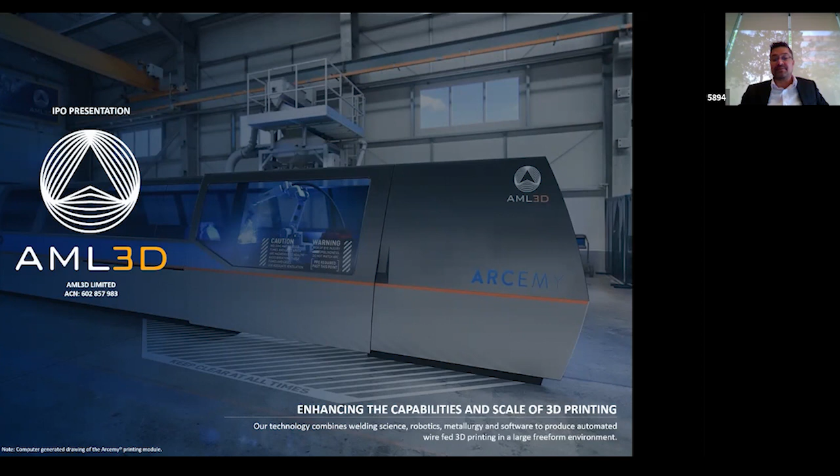AML3D specialises in large-scale 3D metal printing of commercial parts using proven wire arc additive manufacturing technology. We hold all major certifications and we're the only globally certified wire arc additive manufacturer on Lloyd's Register. So what this means is our clients can put our parts into commercial operating use.

WAMSOFT is our proprietary intellectual property which combines metallurgical science, software and robotic technology to produce large-scale, free-form 3D metal printed commercial parts. Our main manufacturing facility is located in Adelaide, Australia, and is currently being relocated to a larger premises to support our growth.

With the use of funds, we will be establishing a presence in Singapore, mainly to be closer to our clients there. Our technology is disruptive to traditional manufacturing processes such as subtractive, casting and forging methods. In particular, we deliver less waste, faster production at a more cost-effective price compared to traditional methods.

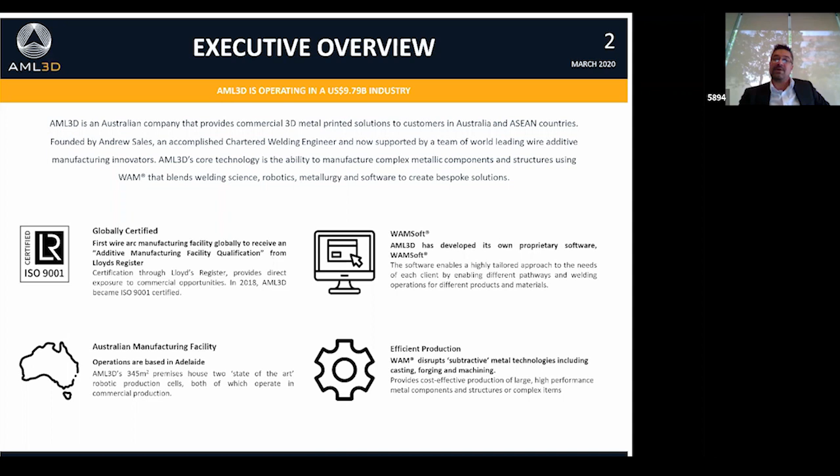A good example is one of our clients who currently buys a 1-ton aluminium billet and machines that down to 300 kilos for his finished part. We can 3D print that and deliver it to them, utilising 100% of the wire feedstock with zero waste.

In relation to the board, we have a very strong and balanced board with extensive industry experience across all the main markets that we operate in. Firstly, Stephen Gerlach, former chairman of Santos, Elders and Equatorial Mining, who brings corporate governance, listed company experience and industry networks. Andy Sales, our managing director and the founder of AML3D, with 25 years experience in welding technology within the oil and gas sector, and also holds a double master's degree in engineering and metallurgical science.

Myself, former global director for M&A for Worley, and former CEO of a number of engineering and technology services businesses. I've been working closely with Andy over the past 12 months in an executive director role, mainly to support the build out of the executive team and more so the operating capability of the company.

Kevin Reid, former partner of PwC and BDO, heads our Audit and Risk Committee. Len Piro, former CEO of Department of Industry and Trade. And Christine Manuel, our company secretary and chair of the Governance Institute.

In relation to the market outlook, the market growth in general across all additive manufacturing is on a steep rise, mainly due to these technologies being commercialised and adopted by the market. This is seen by estimated sales moving from about 16 billion in FY20 to around 35 billion in FY24.

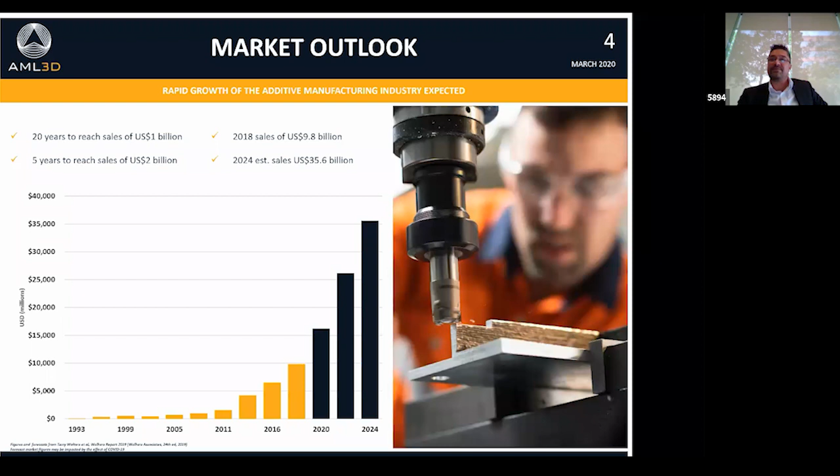So what is WAM? WAM combines metallurgical science and software to effectively create robotic code in order to produce large-scale, free-form 3D metal printed parts. In simple terms, we take an AutoCAD file of a part, and through our extensive libraries of metallurgical properties, our proprietary WAMSOFT technology converts that into code.

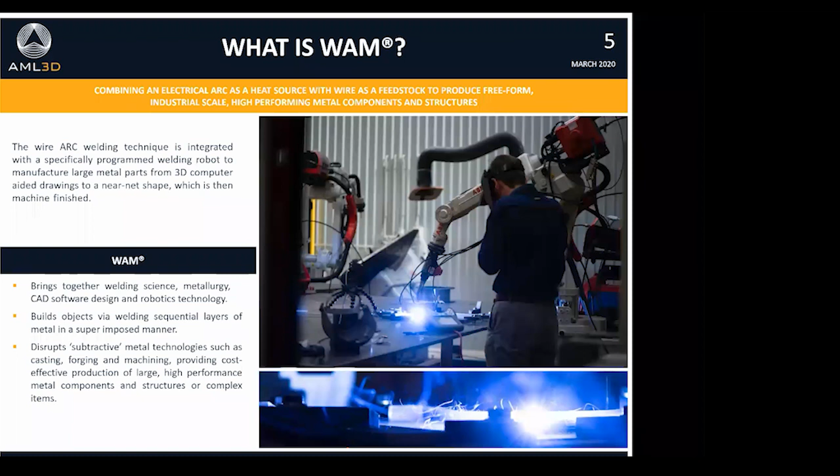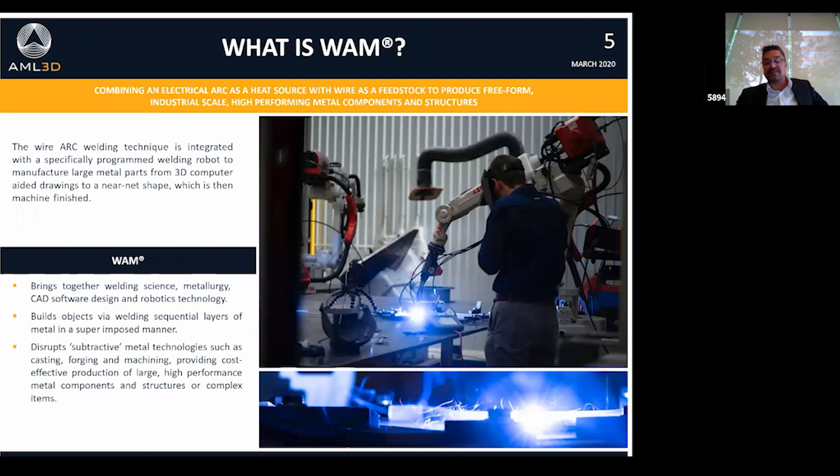Utilising robotic technology to produce the part, it's important to note that using wire feedstock, we sequentially layer molten metal based on the art of knowing exactly what the required feed rate is and bead size based on the alloy, and secondly, understanding the geometric orientation of where to start and where to finish. This produces very high structural integrity in our parts, and consistency and repeatability, which is the reason why we've received certifications by all the main certifying bodies, and our customers have commercial parts in place.

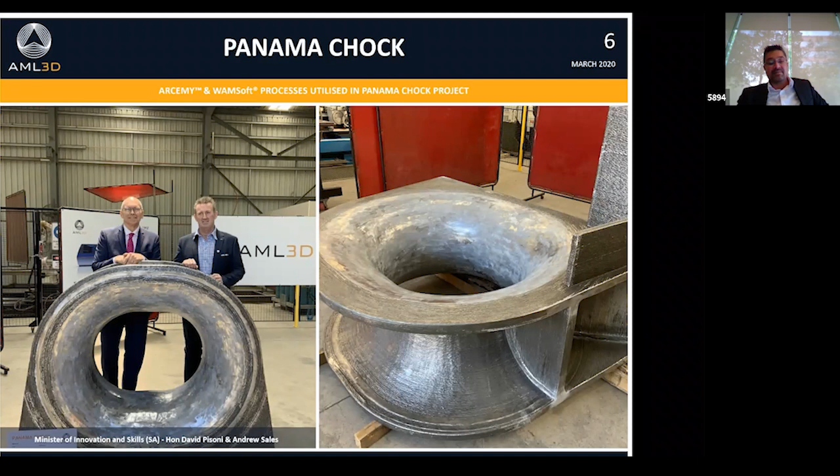So a bit of a show and tell on the Panama Chock. What is a Panama Chock? This sits on the top deck of a ship, and they tie a rope around it when the ship comes into dock. Typically one ship would have 4 to 6 of these on the top deck. This is one of the largest by weight 3D metal printed parts in the world, printed using a carbon steel alloy. It weighs in at 1.2 tonnes and has 50% greater structural integrity compared to traditional manufacturing methods.

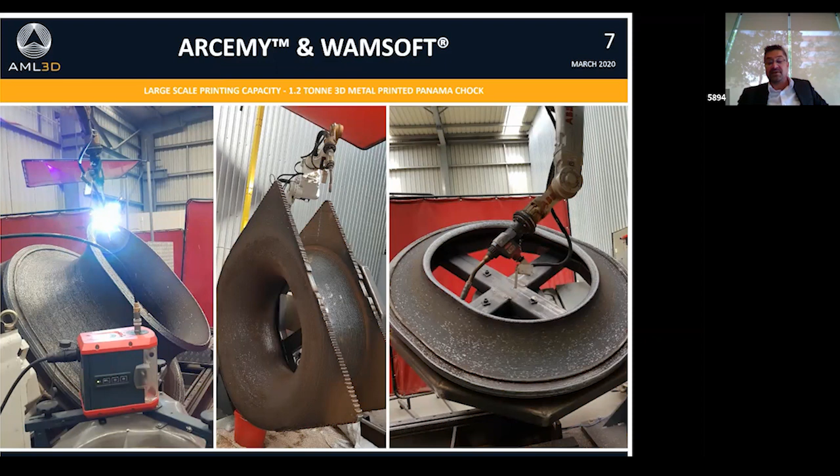This part is actually for a commercial client based in Singapore in the marine sector. It's been certified by DNV under Lloyd's certification. It's been delivered to the customer with a view of becoming a recurring part for their end clients.

In relation to certifications, we do feel that this is really one of our core strategic advantages. We hold the main global certifications for wire arc additive manufacturing. As mentioned previously, we are the only globally certified wire arc additive manufacturer certified by Lloyd's Register for the marine sector. This was a real turning point for the business back in 2018, and is the reason why we have quite a concentration of customers within the marine sector, in particular in Singapore.

ISO 9001 certification provided us with entry into the aerospace sector and opened the doors for us to engage with our global aerospace customers. We're fully compliant with the American Welding Society standards for the production of parts using additive manufacturing, which has also opened the door to the US market for us. It's really important to know that without certification, these parts can't be put into operating use, and that's the reason why we put all this in place.

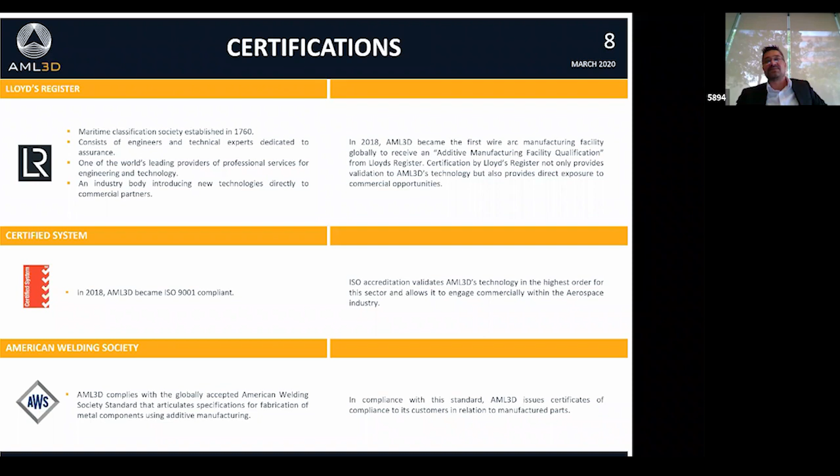In relation to our target markets, we focus on 4 main industry sectors: marine, defence, aerospace and resources. A typical list of parts we have produced and can produce is listed below. These main industry sectors really play to our strengths, and it is where we've seen the greatest demand to move towards adopting additive manufacturing. I'll talk to this further in a minute.

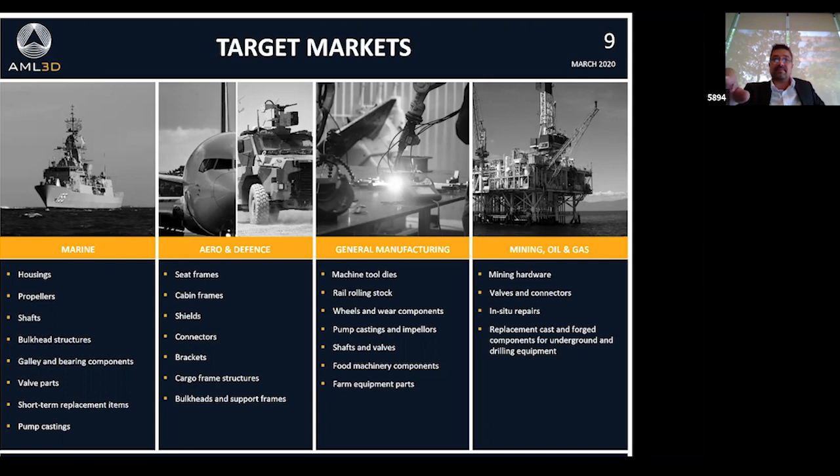Our business model is a simple model with 4 core revenue streams. The first is contract manufacturing, which is typically traditional subcontracting of manufacturing of parts for our clients. It's mainly direct to market as it involves a fairly high degree of technical knowledge and experience.

The second is the sale of a complete ARCEMY system, which is typically for customers that are looking to insource the technology and have that internal demand and capability to manage the process. Moving forward, access to this market is typically going to be through appointed distributors and resellers.

Thirdly, annual licensing, maintenance and support fees, which is a percentage of the total capital value of the sale of an ARCEMY unit. And lastly, fourth, the sale of consumable wire. In order to maintain the certification of the ARCEMY system, the integrity of the supply chain needs to be maintained, so the sale of certified wire feedstock by an authorised reseller, which we are one of, is required. There are literally hundreds of readily available wire alloys in the market as it's based on commonly available welding wire.

In relation to contract manufacturing services, as mentioned previously, we have a concentration of clients in the marine sector, mainly as a result of the certification with Lloyd's. In addition, we have a range of clients that we currently engage with across all the other sectors.

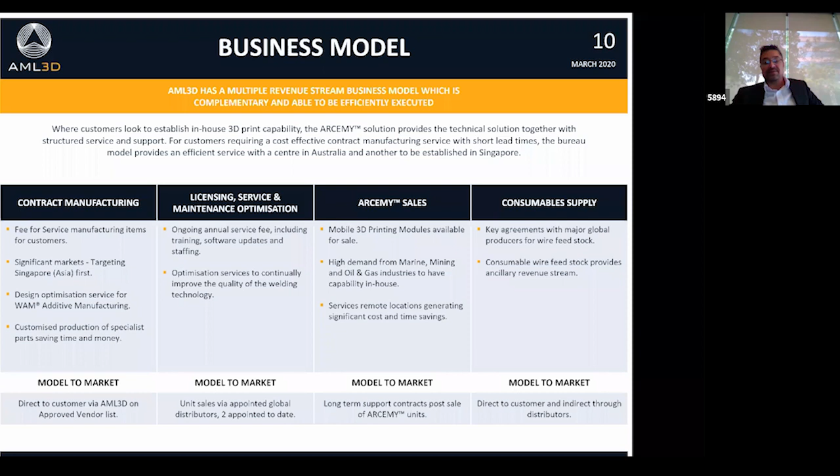It's really important to note, though, that our clients engage us to produce commercial parts for commercial use. We're typically not engaged for internal R&D projects given the maturity of the technology.

In relation to key growth objectives, phase 1 growth objectives are complete, which include obtaining relevant certifications, establishing the Australian operating facility, first sale of an ARCEMY unit into Singapore, and having repeat contract customers.

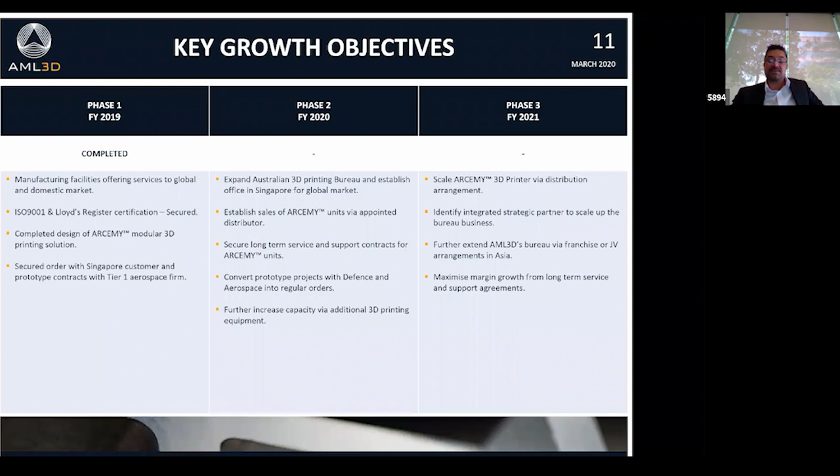Phase 2, following the IPO, is the establishment of a presence in Singapore, the expansion of the Adelaide facility, and establishing sales channels for the ARCEMY system. And thirdly, extending our business into the Asian markets and expanding the distribution channels globally.

In relation to the investment offer, we are pleased to say that the offer has been oversubscribed and we've had wonderful demand from institutional and retail investors. With an enterprise value of 15 million, notwithstanding the prevailing market conditions, I do believe this represents good value to our investors.

The capital raise is to deliver the following: establish an underlying earnings model from sales and licensing, accelerate the sales of ARCEMY, capitalise on Tier 1 Singapore and Asian customers, and also improve margins by just being closer to those end customers.

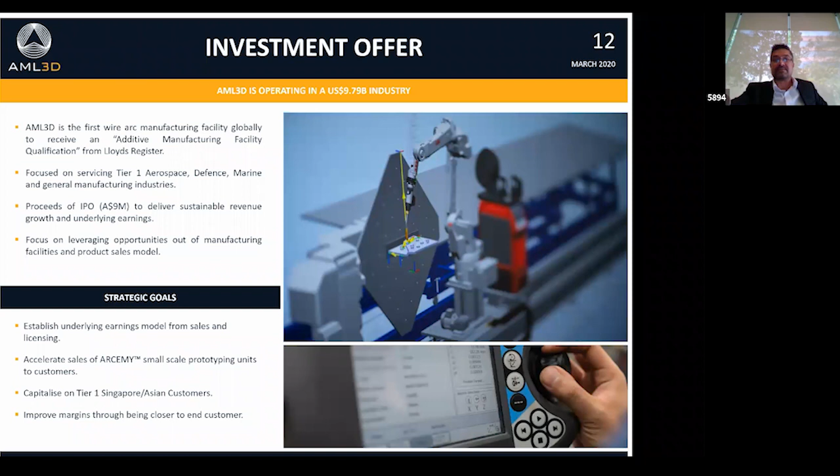In relation to the use of funds, with the combination of the cash on hand and capital raised, 4.3 million will be deployed in a measured approach to establish a presence in Singapore, to expand and be closer to our existing and new customers. 2.8 million for the relocation and expansion of the Australian facility.

0.4 million for the development of an automated integrated CNC machining capability to operate in parallel with the existing 3D printing production process. 2.1 million for working capital and 1.1 million for the cost of the offer.

On the capital structure: offer price of 20 cents per share, issuance of 45 million shares under the offer to raise 9 million. The options on issue largely relate to the 2-for-1 pre-IPO offer plus board and management, with an enterprise value of 15 million at listing and a market cap of around 25 million.

On the timetable: cleared funds and offer to close late March. Quotation of company shares on the ASX is targeted for around mid-April.

Just in closing, I'd like to thank you for taking the time today to hear what I believe is a very exciting time in our business. We have commercial customers right now and ready to produce commercial quantities of parts for them. We look forward to your ongoing support as the business continues to deliver on its plans. Thank you.